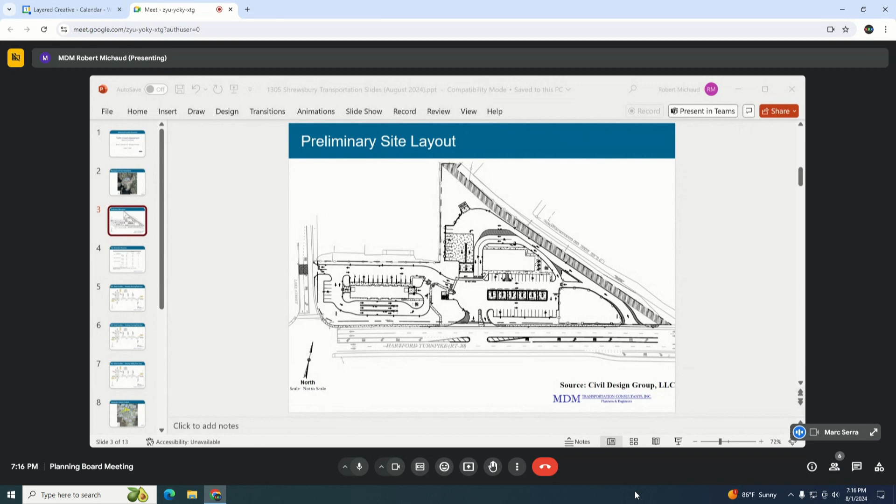In terms of traffic impact, we've conducted a full traffic impact and access study to a state-level standard. The project will also undergo a MEPA level review because of its adjacency to Route 20. That study quantifies how much traffic we believe will be generated relative to what's currently on the street and what we expect will exist 7 years from now, including many area background growth projects. There are approximately 9 area projects incorporated into this analysis.

Because I'll have to reshare this, I apologize, but You want me to try to drive the? yeah, could you, Christopher? I don't know why it's not.

While that loads up, we've applied industry standard trip generation rates to understand how much traffic this would generate in the aggregate. The next slide provides a summary table of what that looks like.

It's broken into the total number of trips, which is on average, depending on the peak hour, about 200 directional trips either coming into or leaving the property—slightly higher in the morning, slightly less in the evening.

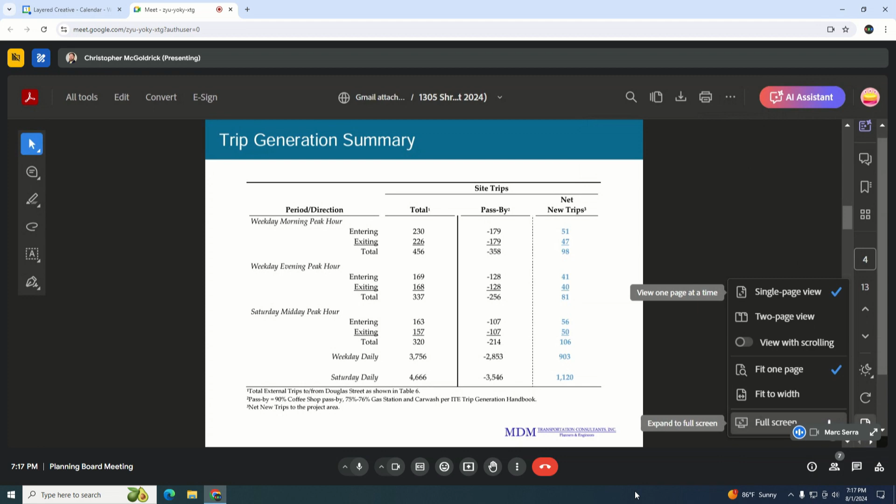Most of those trips are what are known as pass-by trips. These facilities—gas, convenience, car wash, quick service restaurant—are facilities of convenience that draw most of their business from the existing passing traffic stream. It's a well-established fact, especially on Route 20, a high-volume principal arterial road. The second or middle column indicates what proportion of total trips are actually not new; they're simply being diverted to and then leaving the site from the existing stream.

So the net new traffic from this combination of uses is approximately 40 to 60 peak directional trips, either coming in or going out per hour, depending on the peak hour.

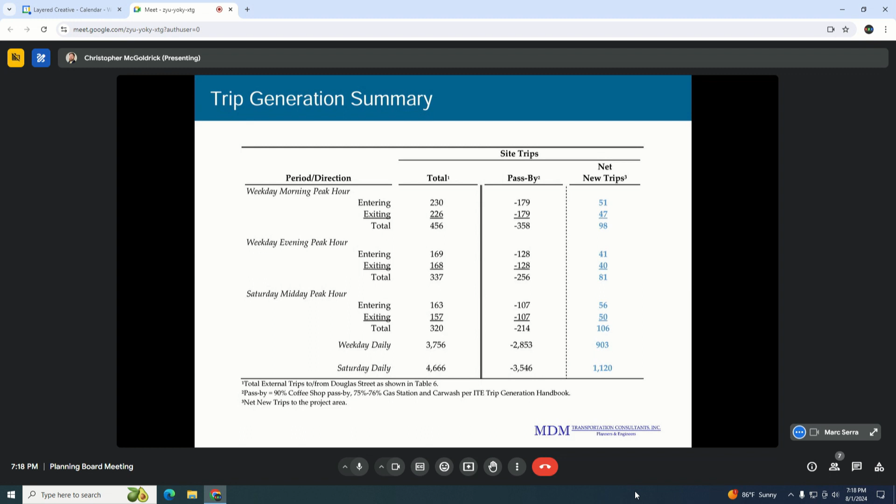The next slide indicates in a very schematic way what those new trips look like during a snapshot in time. This is a weekday morning peak hour.

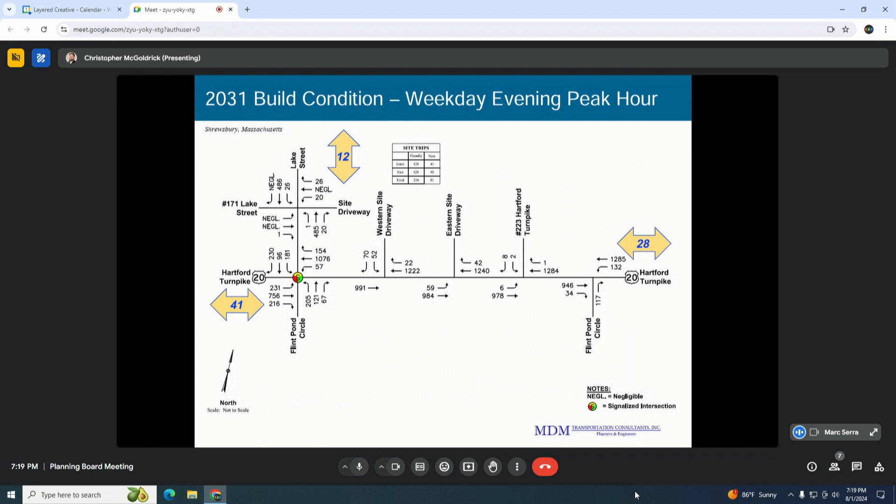This has been incorporated by default as part of the planning process applied to develop the infrastructure at this frontage. The next slide shows the equivalent weekday evening peak hour, with actually lower numbers, and the following slide shows the equivalent Saturday midday, again with fairly modest numbers.

You'll also see that there's not a whole lot of change between what we call no-build and build. Those modest numbers of trips I just presented, representing between one vehicle every two minutes to as much as one vehicle a minute, really aren't changing the dial on what this analysis is saying. So there is ample capacity, and it's not a surprise given the recent reconstruction of that portion of Route 20.

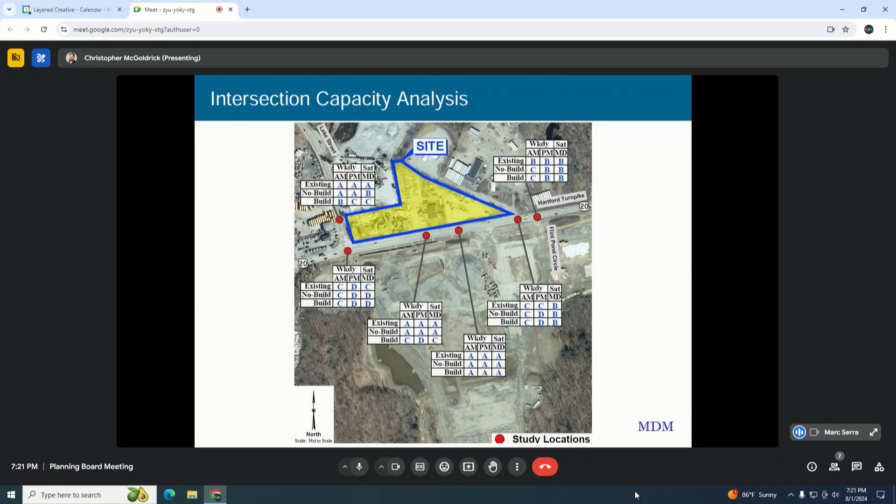Now, as we begin to look at the site and its functions, which will lead into what Phil will present, we did a queuing analysis, an assessment of how the car wash would function. We've got a lot of real data for car wash facilities. We do a lot of these these days.

This is a single tunnel facility with an operating capacity of about 120 vehicles per hour, so it has a high capacity to move vehicles through. It has the ability, based on its stacking lanes, to accommodate as many as 30 to 40 vehicles with absolutely no influence on on-site circulation or access.

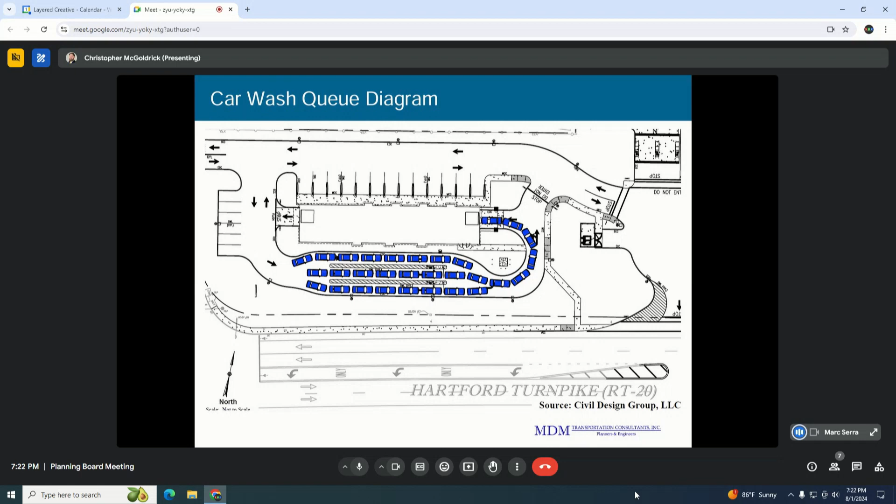The typical queuing conditions, presented in more detail in the traffic report, are going to be substantially less than what's shown in the diagram here. So we're very satisfied that there's ample on-site queuing capacity to function well without influencing Route 20, the signal, or on-site circulation. The next slide presents a circulation assessment for the largest potential vehicle accessing and circulating within the property.

I mentioned earlier that the more easterly driveway, which is enter-only, is specifically designed to accommodate a WB67 or fuel tanker vehicle, both into and behind the site to the fueling position, and then leaving the site as a left turn to continue east if needed. There's plenty of on-site capacity for circulation, and plenty of room at the driveway to facilitate appropriate deceleration into the site and eventually to the stop position. The next slide presents similar information for a different vehicle type.

This is someone coming eastbound who wants to turn left into the property. They get into an exclusive left turn lane that exists there today. It will be slightly extended to allow for a better deceleration into this driveway, one of the comments that DOT had for us, and its swept path also works quite well.

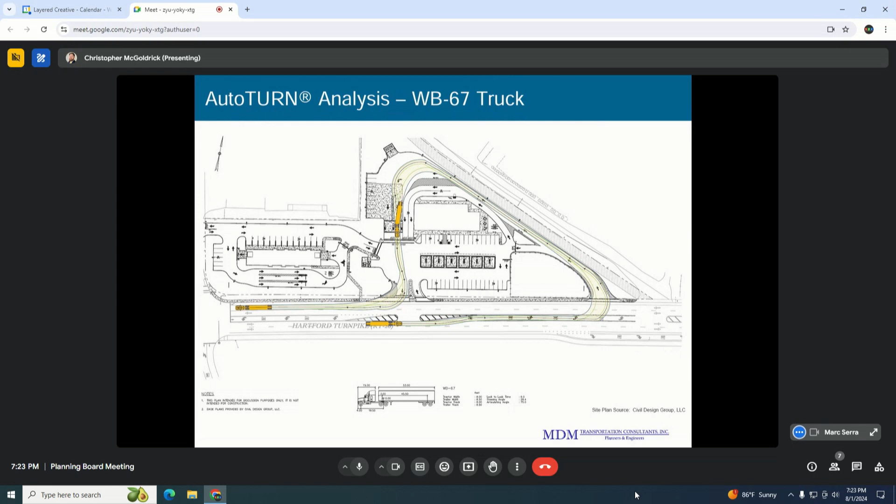When departing the site, making a right turn to go westbound toward Worcester, you'll see that the driveway design specifically accommodates that larger sweep. The design will include striping and other elements that restrict this for smaller vehicles, but allows for that larger sweep of a vehicle so it can turn entirely into the rightmost through lane at the signal.

The next slide presents yet another version of swept path, this time for a fire truck—Shrewsbury's tower vehicle. We assumed the worst case scenario where they need to come in from the Lake Street driveway, and all of the circulation elements within the property are sufficient to accommodate all of those sweeps.

Finally, the last slide reflects a different path by that same emergency tower vehicle. So from a circulation standpoint, this is well designed with very modest impact. It will be subject to DOT review and approval through access permitting, and it is subject to MEPA, so there will be other eyes on this as well, not only MassDOT but others.

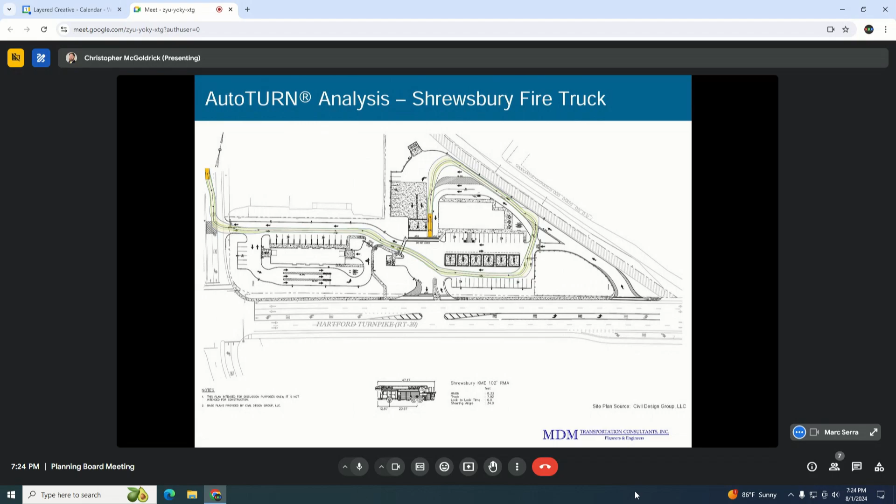So with that, I'm going to ask Christopher to open up the site plan set, which Phil will present. I'll hand it over to Phil.

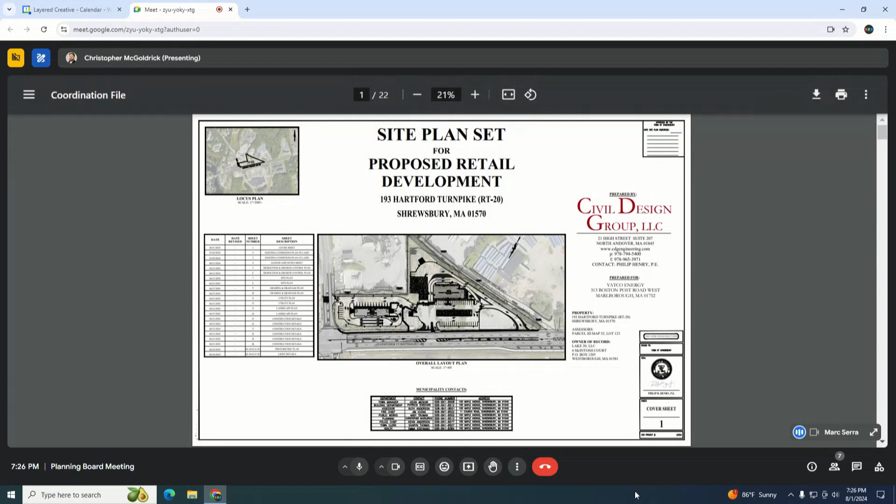Christopher, since Bob gave an overview and locus of the project, I think it'll be most efficient if I give a zoomed-in presentation. Let's start on sheet 7, the site plan. I'll go through the site plan, grading, and utility plan. You'll be looking at the westerly half of the site, then the easterly half, and then vice versa.

As Don had indicated, this site is zoned limited industrial, and it's also zoned Route 20 overlay. We chose to comply with the underlying zone, the LI or limited industrial district. So we think this site complies in terms of its building setbacks, landscape setbacks, requirements for stalls and the like.

So what I'll do is briefly go through and touch on some site elements on each of the site, grading, and utility plans.

Working from left to right, you'll see the site access off of Lake Street, proposed to be a full access curb cut. From there, you would enter the site and immediately see the wash structure, entering from the easterly side. Folks coming in on Lake Street could make an immediate right turn into the queue lane, or go straight.

Could you zoom in just a little bit, Christopher?

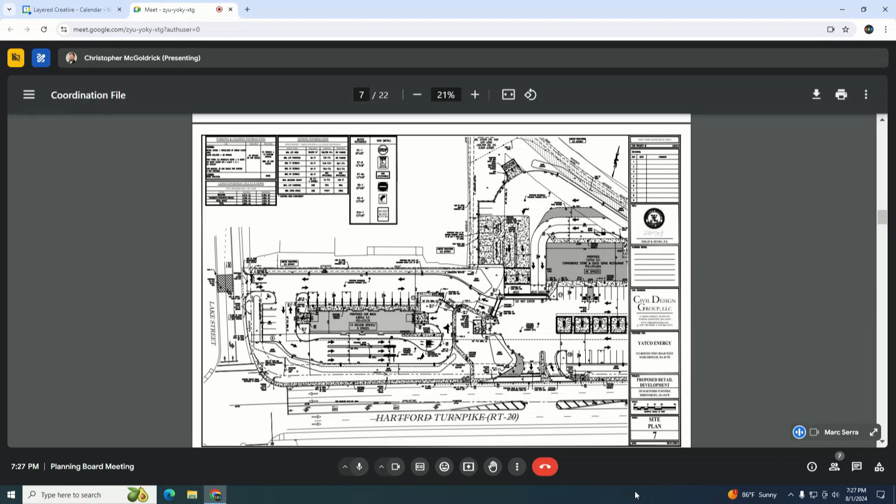Folks entering on Lake Street, proceeding straight, will encounter about 13 vacuum spaces just north of the structure. So folks could either vacuum their cars before or after.

Folks that eventually make it through the queue line will enter the car wash on the north side, making a left-hand turn into the structure. If for some reason those folks need to exit the car wash before entering, there's a sort of emergency exit as they proceed straight, as opposed to turning left into the car wash. From there, folks can go left or right.

Folks that go right would be entering the easterly half of the site, where the market and the quick serve restaurant will be, and they'll see the 6 regular, or low-speed, dispensers. On the left-hand side, or north, as they're approaching, they would see the high-speed diesel dispensers, and then the convenience store. Perhaps you can go to slide 8, Christopher.

Now we're looking at the easterly half. You'll see the full view of the 6 low-speed fueling dispensers, with 12 fueling positions. The market is set back behind the dispensers and just to the right of the high-speed fueling dispensers. Behind the high-speed dispensers is the underground storage tanks and 10 employee parking spaces, and just behind that is the trash receptacle, which will be enclosed in a vinyl fence or similar enclosure.

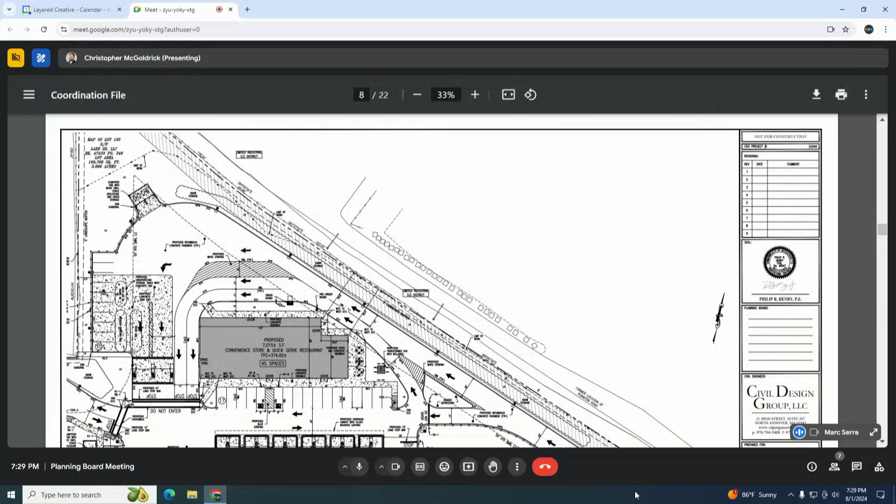This market is supported by 45 spaces located right in front of the building, forward of the 6 fueling dispensers, and accessed via a restricted central curb cut that allows right in, right out, and left in, but no left out—just a left in.

As we move to the easterly side of the site, there's the in-only curb cut, and from entering either entrance on Route 20, folks can get into the drive-through lane, with a drive-through entrance just to the right of the structure.

On this plan, there is proposed to be 29 site lights that are 25 feet tall, including building wall packs. There's ADA parking spaces located proximate to the front doors of the structures, directional signage, and snow storage. Overall, this site will have a decrease of just over 1 acre of impervious surface, or an increase of about 1 acre of landscaping throughout the site.

Sheet 9, Christopher. Looking back at the westerly half of the site, this is a fairly involved sheet, so there's lines going everywhere.

Basically, we're showing the contours. Mainly, the reason I wanted to show this sheet was to show that all the drainage is collected in 12 catch basin inlets and then is piped to the easterly half of the site.

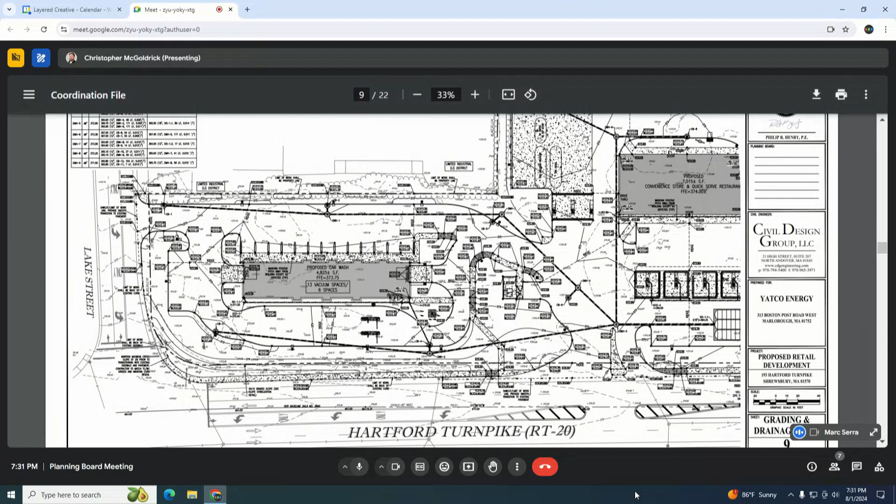Christopher, you can go to sheet 10. I'm happy to come back to this sheet if any folks have specific inquiries, but essentially you'll see there's a subsurface infiltration system just forward of the dispensers. Yep, right there. Most or all of the asphalt on site will be piped into that infiltration system first.

And then there's actually an overflow pipe, or two overflow pipes, that drain into an above-ground basin just east of that. Basically, that system will act as one in higher storms, or less frequent storms, I should say. In more frequent storms, that pond will most likely remain dry, and the water will be primarily infiltrated into that subsurface infiltration system.

Shrewsbury has a local regulation that requires static capture of 1 inch times the impervious coverage of the site. That subsurface infiltration system achieves that. So higher storms will overflow via the two 24-inch drain pipes that discharge into the above-ground basin.

We've had discussions with DOT. This is not only a site low point, but it's also, I'll call it, a regional low point. Along Route 20, this is the low point. So we think it's important to have a drainage connection. DOT's initial feedback says that they do not want a drainage connection, despite the fact that there is currently a drainage connection to the Route 20 driveway, Route 20 drainage system.

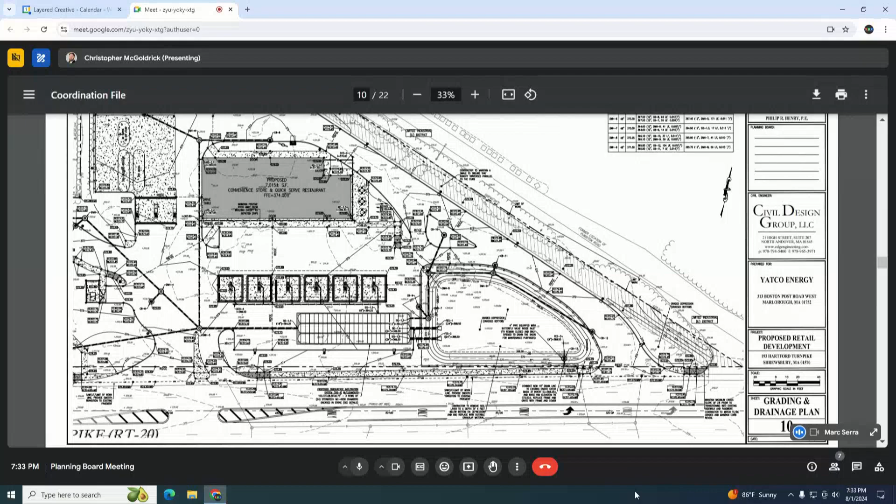However, as belt and suspenders, this above-ground infiltration system, should water get into that, which it will, and not infiltrate due to lack of maintenance or for whatever reason, there is a drain at the foot of that basin with a valve that can be opened to allow that runoff to drain, should it require maintenance.

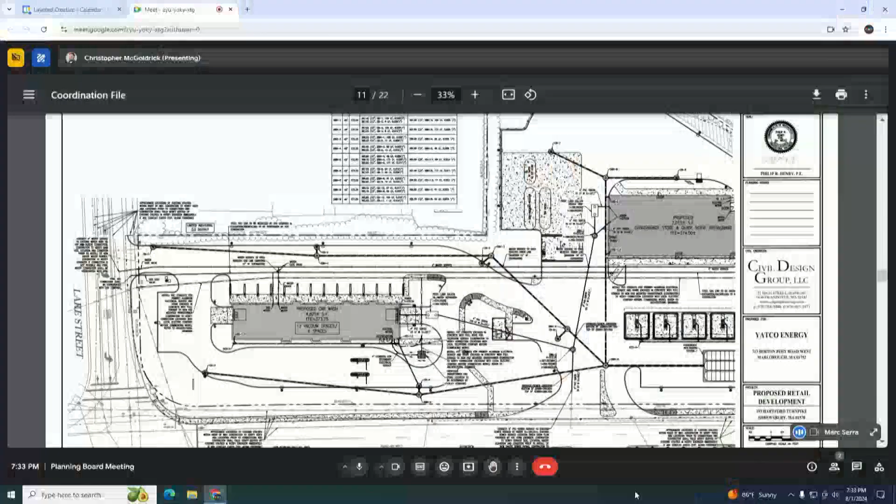Sheet 11 basically is the utility plan. This plan looks very familiar to an application that was on this site, probably before you guys a few years ago. Basically, the connection points for water, gas, and electric are the same, which come off of Lake Street, and they traverse west to east throughout the site and then service the buildings.

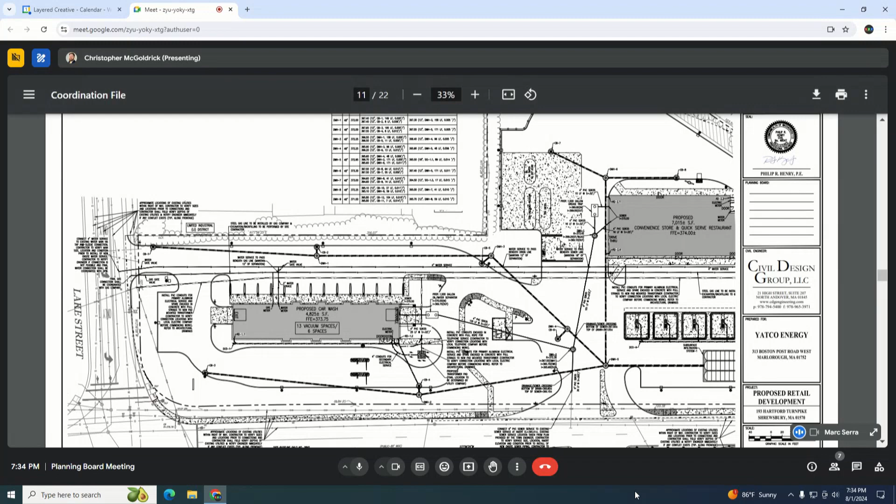And then the sewer connection is through an on-site capped sewer service in Route 20, right at the central driveway. So that will look familiar for those of you familiar with the project that was before you a few years ago.

And that's about it. Lastly, landscaping. We're proposing, I think, 15 new trees. We're concentrating the landscaping along the street frontage, over 200 shrubs and 150 ground cover. So that's the high level, but I'm happy to get into any more specifics. Thank you.

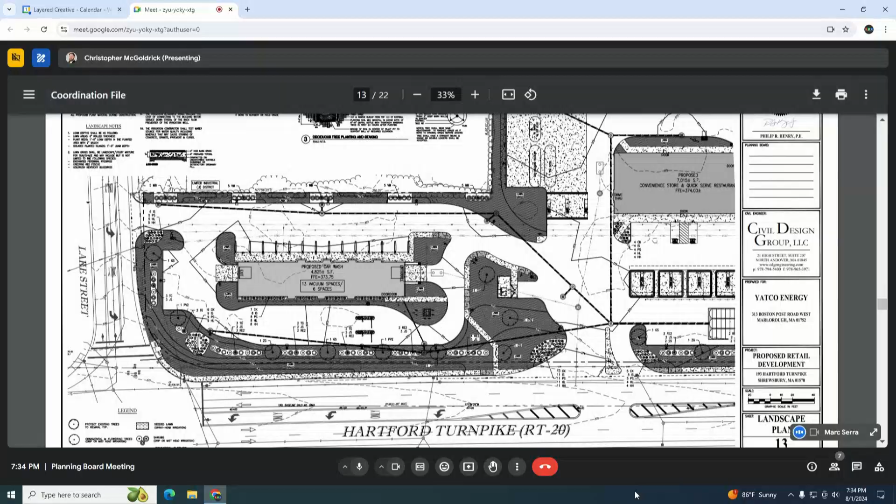Have you estimated the required water need for the car wash? Yeah, so we're estimating about 7,000 gallons per day. Comparatively, the market's going to use next to nothing compared to that. So we're proposing 7,000. The details of that have not been completely worked out yet.

There may be some of that's reclaimed, but we haven't worked out those details yet.

In terms of the access, that central in and out, when you're coming out onto Route 20 from the central access way, can the trucks take a left turn heading onto Route 20 East, or is it only right turn? Whether it's a passenger vehicle or a larger truck, they will both be allowed to make that left turn to head east. And that's an important factor for this particular site.

There's really no other good option to get back east. The benefit of the site and the way the driveway is laid out is that it takes advantage of the gaps that are actually being created by the signal. And even under the long-term growth scenario, the analysis shows that the vehicle queues from that signal don't ever reach that driveway.

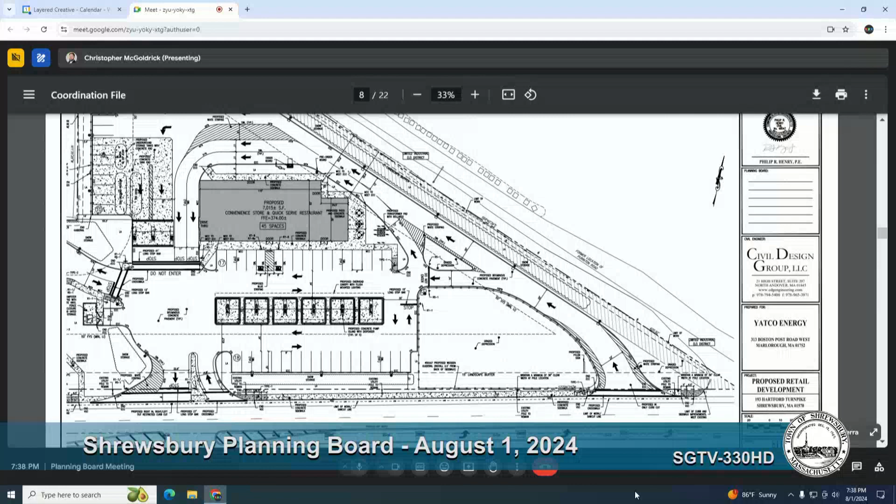We believe that this current design, really the only thing that changed relative to our initial concept was that we took the easterly driveway, the enter-only driveway, and pushed it all the way to the end of the property. What that allows is a more gentle deceleration in that existing left turn lane, which currently serves the industrial use next door to us anyway. So we've got plenty of deceleration area, plenty of storage, and the capacity shows that it all works.

So we don't expect any surprises, and we think, although DOT hasn't formally blessed this, that's subject to a permit, that it's well positioned. Thank you. Anyone else? Yes, Steve?

So Bob, you're saying like 1 or 2 vehicles per minute during peak hours you anticipate would take that left onto Route 20 East from the main access road? That's correct. And where does that main access road line up with the Market Basket breakaway that, in my opinion, works when you're turning onto the Market Basket site heading west?

Right before, the entrance is right by the Clinton Savings Bank. Oh sure, yeah, that's off the map so to speak. So they're not even close to one another. The enter-only driveway, if you focus on the right side, if you go another several hundred feet to the right of that, is the area you're talking about. So none of this access is going to be influenced by or to that driveway for Edgemere.

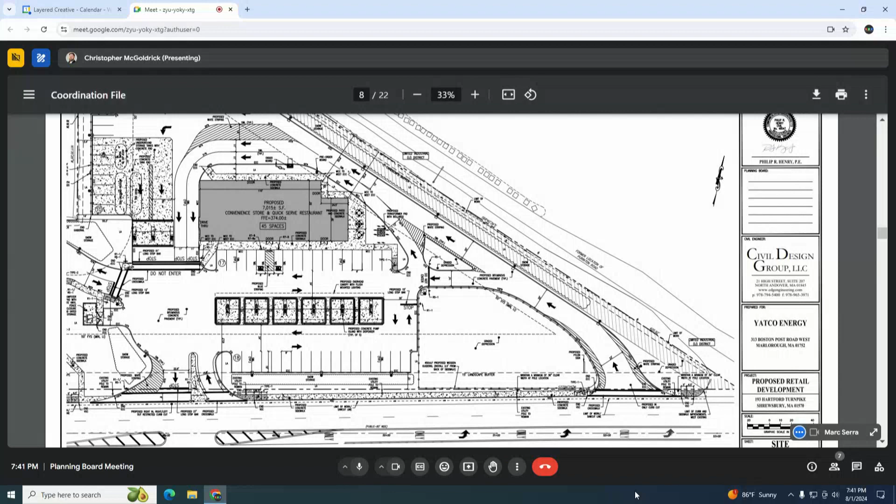Yeah, it's as far north as it can possibly go. Correct. One of the things we very carefully considered, right? You've got the bus terminal driveway, which is very close by there. It's within a couple hundred feet of where the signal is.

One of the features of the design, and it may be shown on the prior sheet, Christopher, is this striped box, this shaded box. The intention of that box is the 'do not block the box' marking. It's really intended to facilitate movements out of the driveway if necessary. But as a practical matter, that driveway is expected to generate about 20 or so left turns an hour. It's a relatively low volume driveway.

During peak? During peak, yeah. If you think about it, folks who may be inclined to go here wouldn't necessarily make it a dedicated trip during a peak hour. I started off by saying that the nature of the uses are that they draw principally from the existing traffic stream.

So if I'm on an eastbound commute in the morning and I need gas, coming down Lake Street, I'm already on Lake Street, I may be inclined to make a left turn into the site, but then I'd probably make a left turn onto Route 20 directly from the central driveway to continue my commute. Vice versa, if I'm coming from Worcester heading east, I'm not going on Lake Street, I'm turning directly into the site. So that driveway is important because it provides a local connection for anyone who wants to get there more directly from the local neighborhood system. But it's not driving a high volume, and it's certainly not driving a lot of new volume.

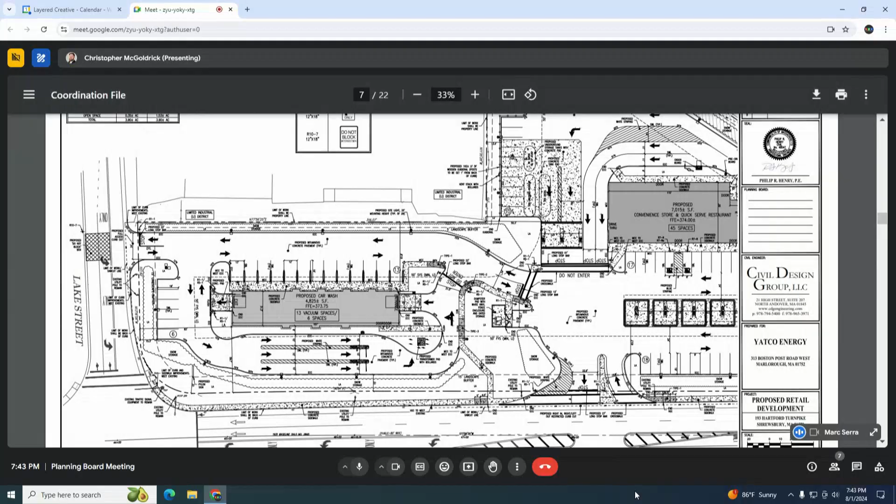My only comment was, if you don't get the left turn eastbound on Route 20, what does that do to the Lake Street intersection? Yeah, that's the exit movement, the left turn exit. But that's not our call, that's MassDOT. Ideally, MassDOT approved a certain infrastructure design along Route 20. Ordinarily, a design like that would accommodate the potential for a barrier dividing the highway at some future date. That was never a consideration. There's no jug handle or ability to make a sweeping left turn from that left turn lane at the signal. It wasn't designed that way. I wish it had been, but it wasn't. So I don't think there was any contemplation long-term that there would be access restrictions along Route 20. Otherwise, that infrastructure would have been designed a little bit differently.

And the volumes we're talking about here are not rising to the level of a red flag, in my opinion. If this was a generator of new and substantial traffic, most of which was oriented to or from the east, I would think differently. But the nature of the use as pass-by oriented, the fact that it's a facility of convenience - if folks are having difficulty getting into or out of here, they'll go to the next place down the road, which is a lot more difficult to get in and out of. Agreed. So they'll end up in Northborough.

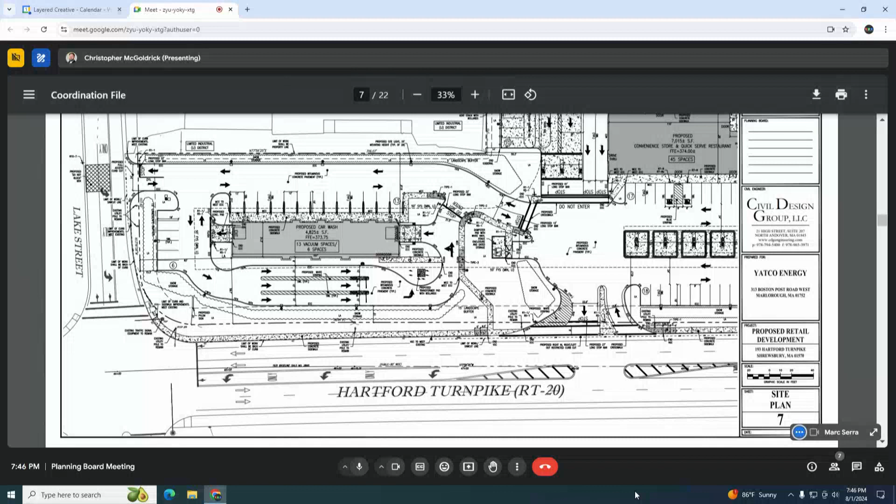Is there a clear line of sight, like in that triangle, from when you start to make the turn off of Route 20 onto Lake Street - is that all going to be low landscaping so you can see across? Right, it will have to be - the sightline triangle is what you're referring to. If you're at a stopped position at the driveway, looking left toward Route 20 to see if there's a gap, you'll easily see anyone coming from the Route 20 corridor. The sightline distance from that driveway extends well beyond just where the signal is. You'll actually be able to see well beyond the signal, probably for a distance of at least 200 to 250 feet, where vehicles are going at slower speeds than normal travel speeds because they're making the turn. The sightline for a right turn from the westbound through lane onto Lake Street - all of the landscaping and features in that area will be designed so the mature growth height is no more than 2.5 feet. You'll have clear visibility to that corner.

Somebody, evening peak, coming out of the gas station on that opening right onto Route 20 that we can see right now - at evening peak, they're not going to have trouble getting out and crossing 2 lanes of traffic? At 50 vehicles per hour, that's the volume that would be doing that. There are more than sufficient gaps. And I understand the volumes on Route 20 are high volumes, all right - that's what's modeled and what we've provided that will be subject to DOT review.

And it functions at a level of service D or better. What that means is it doesn't mean you won't have any delay, it means you'll have to be selective about making that movement, but you shouldn't wait any more than about 30 to 35 seconds. The queuing conditions under that scenario are going to be 1 to 2 vehicles on site. It's not a heavy enough movement, and there are sufficient gaps to accommodate it.

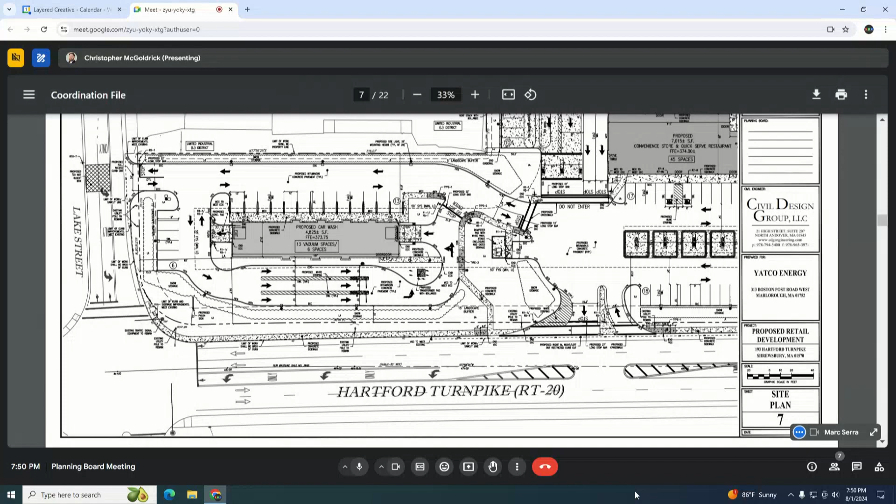I have one other question. So you got the system to collect the water. Is it all gonna be groundwater recharged? It's not gonna, none of it's going out into storm drains? So this site today has runoff from the site into the drainage system, into Route 20, and also into the property behind it.

We are charged with mitigating that runoff. So what we do is we prepare watershed maps. Basically, the watershed for this site is, points north receive runoff from this site today, and then everything else goes to Route 20. We wanted to mitigate, we wanted to basically bring down the peak flow rate to the northerly neighborhood almost down to zero, and then bring everything up front to Route 20, mitigate what's going to Route 20, but then meter it out via a drainage connection. DOT would not allow that initially.

So basically, this system is designed to infiltrate everything up to and including the 100-year storm. However, I will say the 100-year storm does peak over an on-site catch basin that's in the above-ground system that then discharges or is connected to the state system. As belt and suspenders, because things clog over time, we have basically a drain that is closed by a valve that, should water need to be drained out, it can be, as opposed to pumping it out. One last question, I promise.

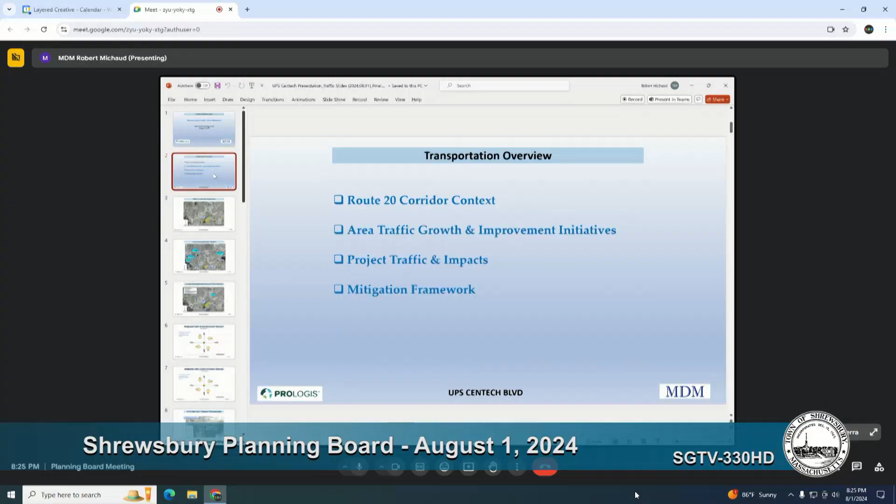So with that as background, what I'd like to do is really cover 4 principal points. There's a recap of the context of this project, which is very important to understand because of everything that's happening and that has happened along Route 20 by way of projects as well as improvements, and how the site sits relative to that. Second, we'll go into detail about specific assumptions on area growth, again an outcome of conversations with Mass DOT and the town planning department. Third, how much traffic would be generated by this use, what its orientation would be to the area, and what its relative impacts are. And finally, and I believe most importantly, the framework of a mitigation package that is intended to facilitate town action to advance improvements along Route 20.

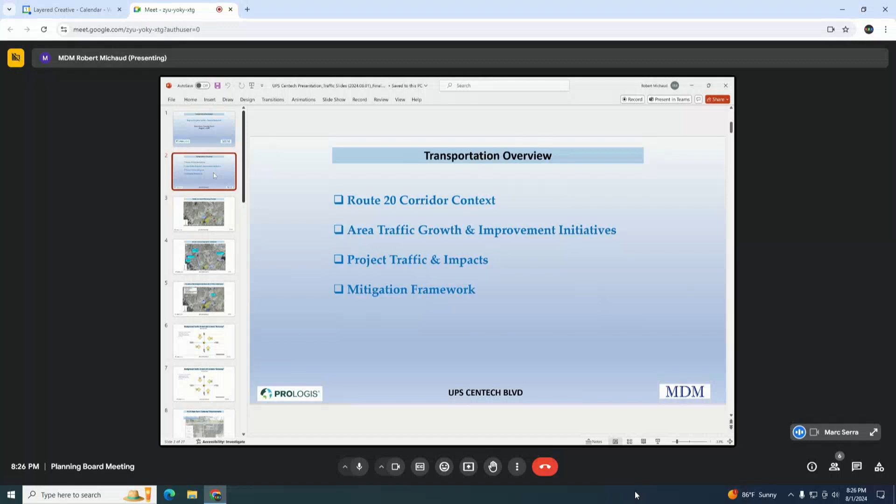So the site is an industrial zone site within an industrial park. So the context of the project is appropriate, and its relationship to the area is shown here on an aerial basis. It's located immediately proximate to Centech Boulevard, an industrial corridor.

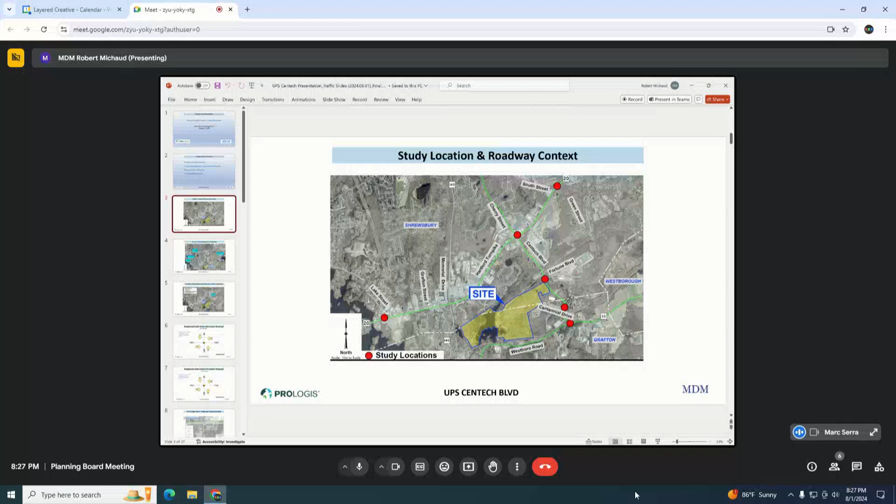Please, can you magnify? Image, if you can make it larger. Oh, I'm sorry, let me try doing that. There you go. Okay, is that better? Yep, great.

You'll see that it's also proximate to Route 20, and what we've studied and included in the impact assessment are the red dot locations. That would include to the west, the Lake Street signalized intersection. That's an intersection we've just discussed as part of another project. The South Street intersection to the east, also signalized, and of course, what we believe to be central to the discussion, which is the Route 20 and Centech Boulevard Cherry Street signalized intersection on the Shrewsbury side.

We've included the Fortune Boulevard commercial driveway as well, and we do have locations within Grafton that are studied as well. Peer review does raise question as to whether or not supplemental locations would be necessary. And the conclusion is that they're not, and I can get into the reasons why later. These are the principally impacted locations where we know that intersections will sustain a 5% or greater increase in traffic volume.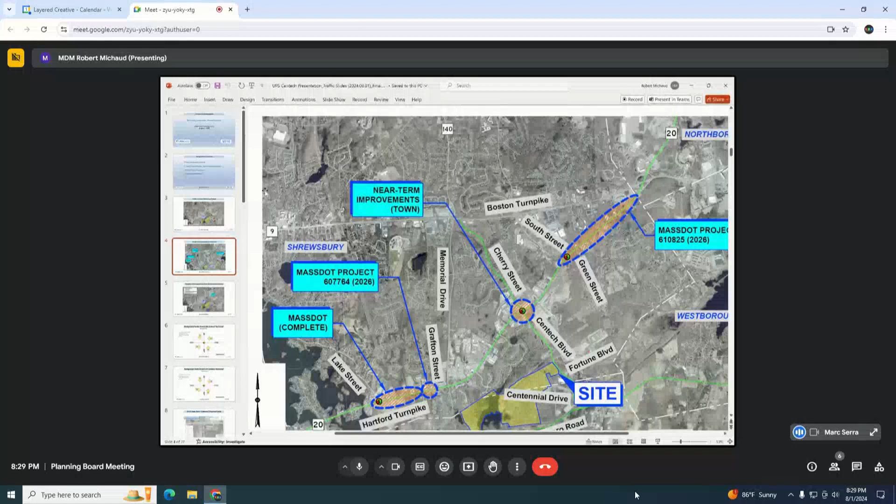And then, of course, you've got the Centech and Cherry Street intersection signal, which, based on our discussions with the town, is a focal point for an improvement initiative to address a pre-existing need for capacity enhancement. The context of that enhancement rests with the number of area projects that have been proposed, approved, or that are in process that cumulatively really drive up the volume there, independent of this particular project.

And they're all numbered here. There are 9 specific projects, one of which we've recently added to the mix because it was recently filed, which is the 5 Millennium 40B project, very close to the T station.

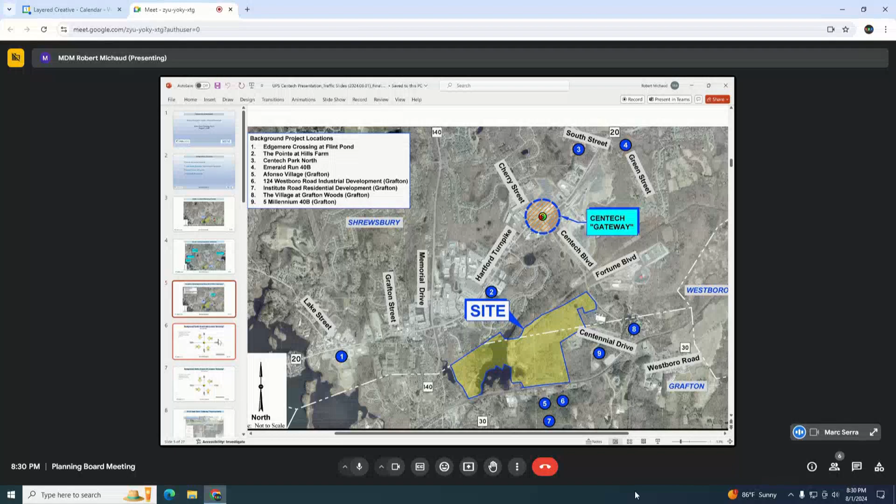So cumulatively, these projects, when you add the cumulative effect at that central location of Cherry and Centech Boulevard, are adding about 100 additional vehicles per hour eastbound, 60 westbound, 60 northbound, and 11 southbound.

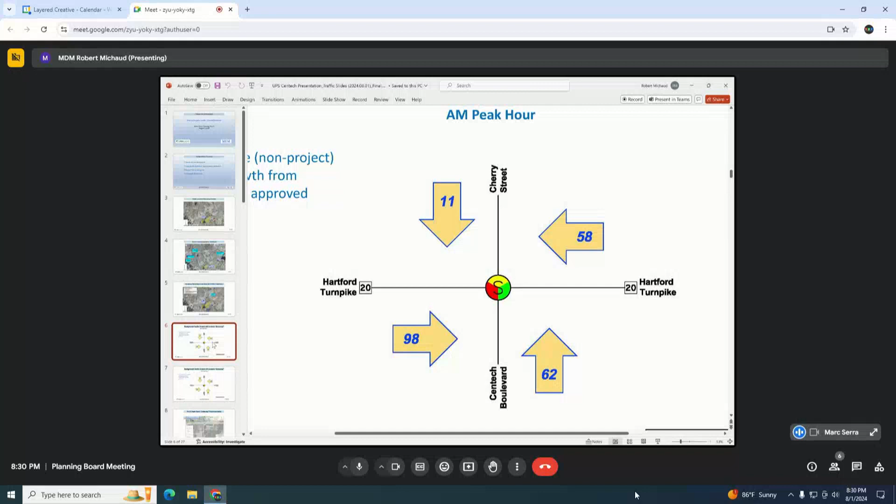And during PM peak hours, it's even higher. It's 124 westbound additional vehicles, 85 additional eastbound, 67 on Centech, and 15 on Cherry. So cumulatively, these are driving the need to do something, because no individual project has tripped the need to independently do something there. And that includes projects like Centech Park North, for instance.

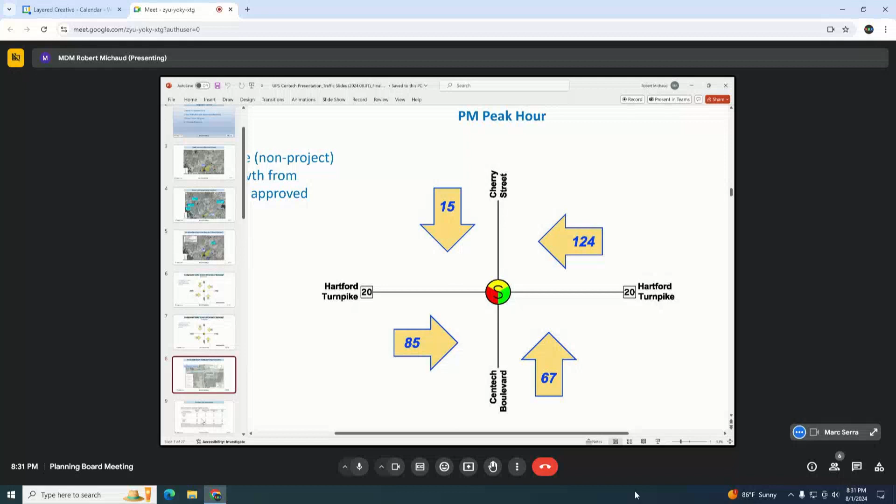In discussions with the town, we've identified an interim improvement that could address those cumulative impacts and those needs that exist independent of the project. I will not paint this as something that is a long-term solution, but it is a solution that will not only address the recently approved projects, but also the additional impact that's created by this particular use on Centech Boulevard.

And what it entails is a redesignation of the lanes and the arrangement of lanes on Cherry Street and Centech Boulevard, so that the side streets operate much more efficiently and are much more responsive to the actual traffic patterns that have occurred over time.

Specifically, if you travel on Centech Boulevard today, there's an exclusive right turn lane, and then there's a through-left turn lane, and vice versa on Cherry Street. Well, the patterns actually favor the opposite arrangement. You really want to have exclusive left turn lanes and through-right turn lanes. That reduces the amount of conflicting volume within the intersection. It reduces the need for the amount of green time that the side streets require, and it enhances the optimal operation of the intersection generally if you retime it.

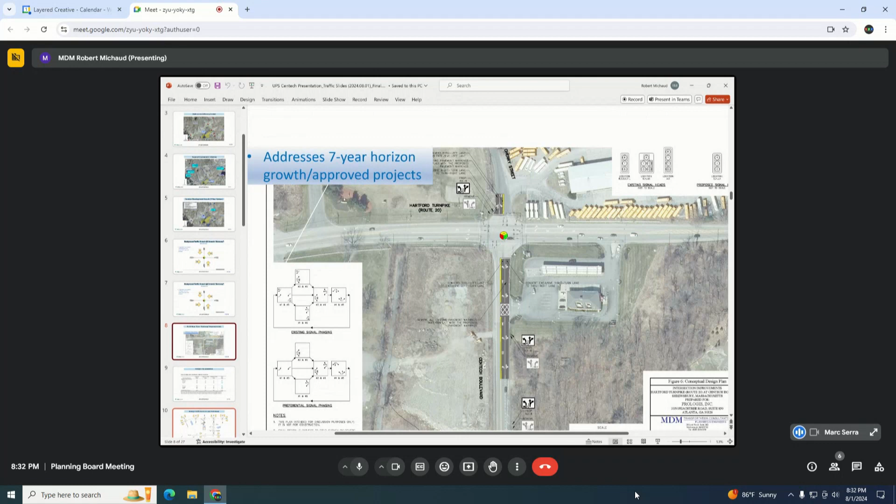So we'll put that aside for the time being, and we'll revisit that, but we'll now focus on what the project is anticipated to generate, and I've got to just zoom out a little bit.

We've engaged, again, with DOT and the town to understand ways in which we can accurately estimate how much traffic this site will generate. Industry standards are typically applied. The Institute of Transportation Engineers has the trip generation manual, which I'm sure you're aware of. You've heard this many times.

It has specific land use categories that typically relate to industrial uses, one of which is called High-Cube Parcel Hub. It's a rather generic description of an industrial process, which over time has substantially changed depending on who the operator is, whether you're an Amazon, a UPS, or a FedEx.

When we looked at applying those industry standards, we were questioned: are those high, are they low, are they accurate to the actual anticipated operation of the facility? So what we did was we went out to nearly identical facilities operated by UPS in Indiana and Salt Lake City that are almost precisely the same size, and in fact have a higher throughput or capacity than what's being proposed here. What I mean by that is that on an hourly basis, these facilities are designed to accommodate a certain output of parcels.

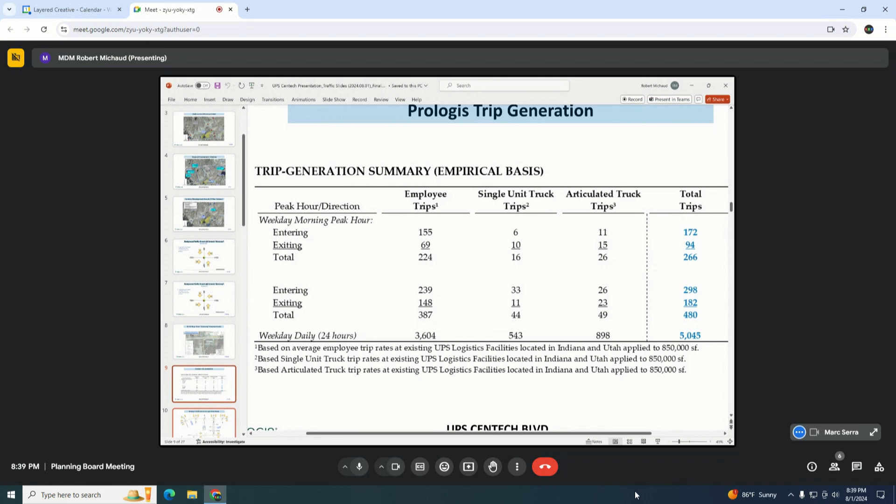You're talking what peak, right? Peak. These are peak. And even in the afternoon, the 480 combined total is still below those industry standards. Even so, we've conducted a supplemental analysis to include those much higher volumes in our study, to throw a wide blanket on this. And the results aren't that much different. We'll get into that in a moment.

And that totals to 69 vehicles, right, et cetera. Mr. Michaud, you're talking all vehicles, not just trailers or delivery trucks? All vehicles, correct.

We'll speak to the difference between what I'm presenting here and the truck numbers. They're much different, but the patterns for trucks will generally follow a similar pattern because of the brown package truck delivery protocols. They'll go to major employment centers and places of residence, so they'll pretty closely mirror existing travel patterns. That's the brown trucks, but the trailers are a different issue. We'll cover that in a moment.

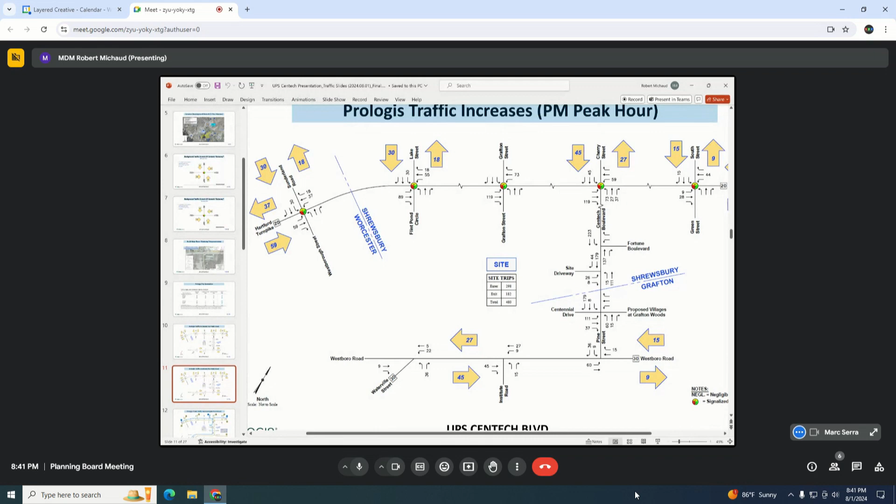Is that already in the study? It's in the peer review response. It is? Actually, I'm sorry, let me take that back - our response in peer review articulates this but does not have the graphic. Oh, okay, so this is the first time you've probably seen this. We wanted to make that and frame it - we tried to match the color of the truck too.

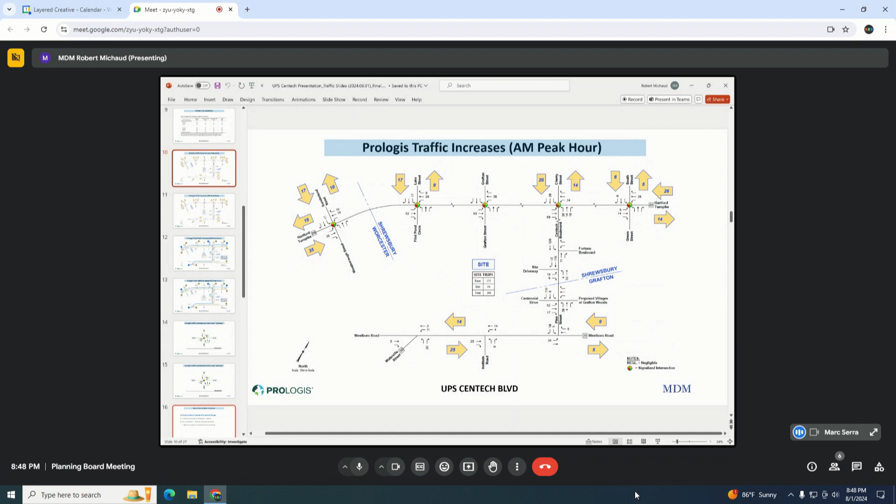Okay, so there is more traffic on Route 20. Absolutely. But the through traffic number is going to stay the same. At the intersection of Centech Boulevard. Right, and that makes sense, because every time I look at that, I was trying to figure out how that happened, and I even went back and I could not figure it out, but now it makes sense. Yeah, okay, so thank you for asking for the clarification.

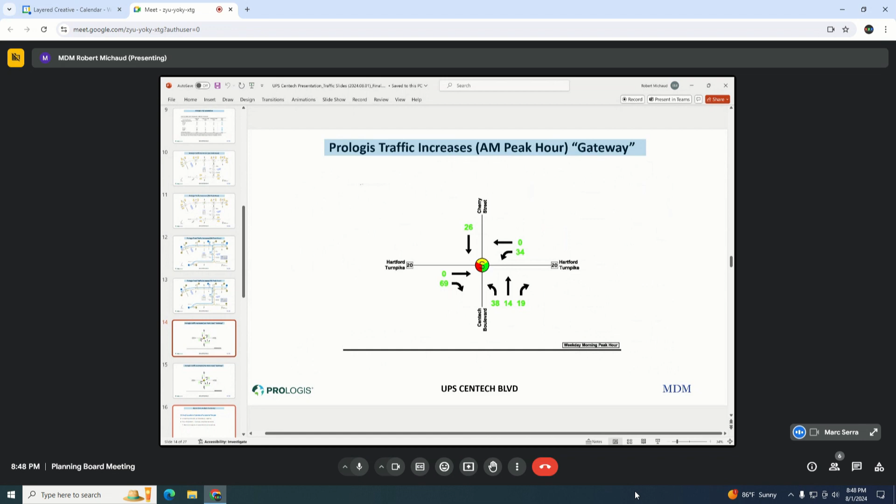So really, the purpose of this graphic is to say, look, I showed an earlier graphic showing the cumulative volumes from other already approved projects, none of which have made any contribution to mitigation here or elsewhere along Route 20. And they're substantial. These are the additional volumes that are specific to this project. They're actually far less than those cumulative effects, but they are adding to that cumulative effect.

And if we look at the PM version of this, the volumes are a bit higher. Right turn movement onto Centech went from 69 in the morning to 119 in the evening - it's about 2 vehicles a minute. So we are increasing volumes here, but they're manageable increases, and they're not increases on what we call the critical intersection movements, which, in the evening, as an example, would be a westbound through movement.

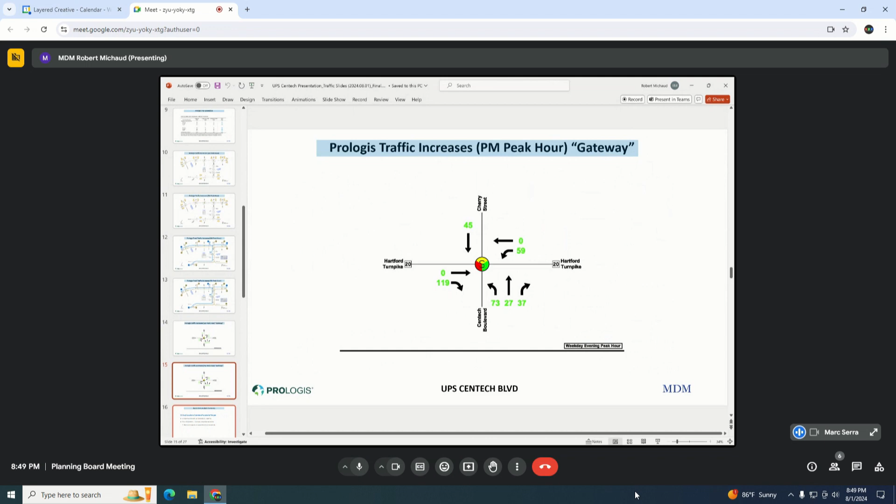We're not introducing additional through traffic there. We're actually absorbing them as a left turn onto Centech Boulevard. Further up on Route 20, it's certainly increasing, but when they get to this intersection, they're then turning off of Route 20. So really, given that as a context, we've done a very detailed analysis using approved standards that are subject to peer review.

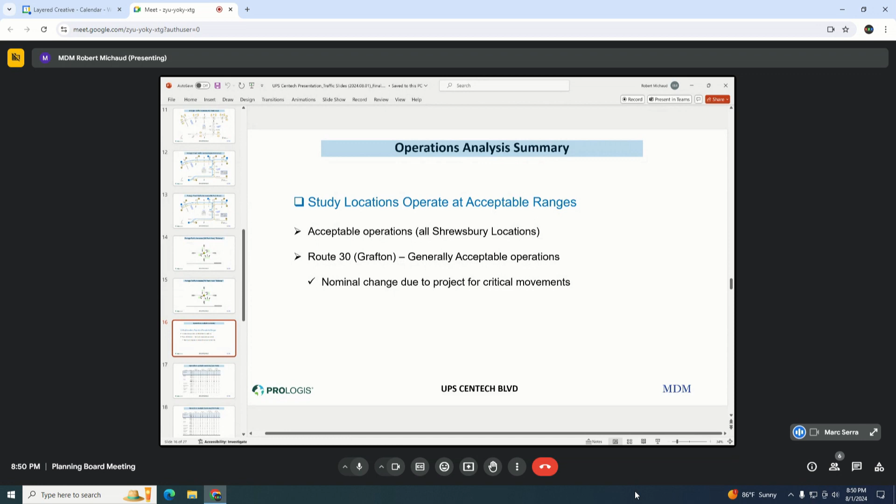And we're assuming, based on our discussions with the town, that there will be an implementation of near-term improvements at Centech and Cherry, based on the prior drawing that I showed. And with those in place, acceptable levels of service can be achieved, right? Is the improvement there a magic bullet solution? It is not, right? MassDOT and the town are both aware and are continuing to pursue longer-term improvements that are needed, independent of what we're doing here, and that's just part of the story.

So acceptable ranges, you're talking about that intersection? Yes, any intersection. No, but this, what we were just talking about, you were talking about the intersection. Yes. So we weren't talking about capacity on 20 that might be driving by, right? Yes. Okay. Absolutely. So volumetrically, that's what these tables are, and there's a lot of numbers and letters on this.

But I've highlighted the most impacted location, which is the Cherry and Centech Boulevard intersection, and I can kind of zoom this in a little.

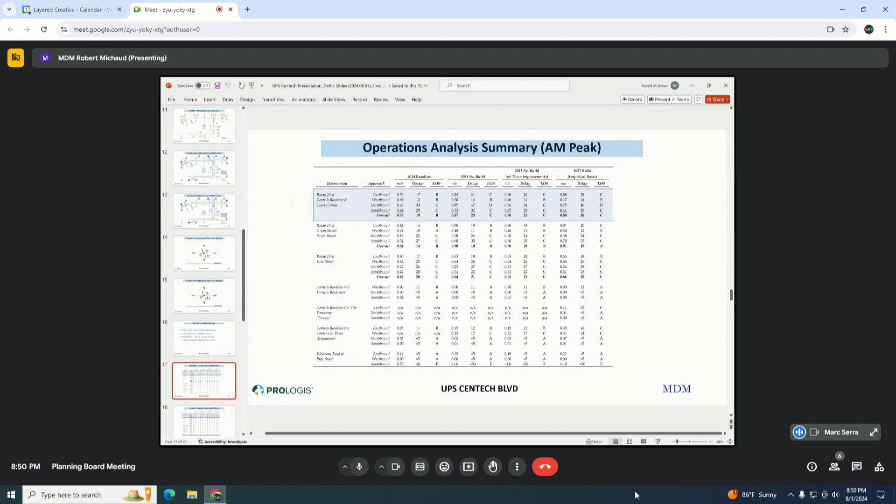An acceptable operating standard, as defined in the state, is a level of service D or better operation. It doesn't mean that queuing won't happen. It means that the average amount of stopped delay a motorist experiences should be less than a certain level.

Which at level of service D is 40, actually 50 seconds or so, or less. In this table, this is a weekday morning peak hour, you can see the baseline conditions at that location are at B or better. There are C's, northbound and southbound. Those go to D in one example because of cumulative growth independent of the project. Eventually when the town implements an interim improvement, that actually improves, goes back down to C, and remains a C with this project in place.

Morning's not the issue. Evening is the issue at that location. Anyone who travels that on a regular basis knows that. Any other location we've studied is well below capacity, level of service C or better at virtually every location within Shrewsbury. That level of service C or better operation is an outcome of the improvements recently implemented on Route 20 at Lake Street, for instance, or that are in process east of here from South Street moving east. So there aren't any capacity constraints per se along Route 20 in Shrewsbury, but the focus is what happens here where all of that volume converges for our site.

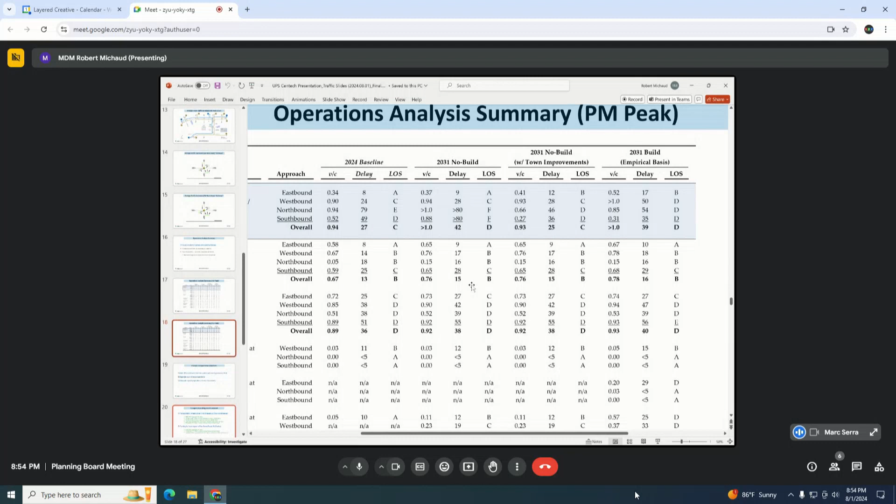Okay, thank you. And as was the case in the morning, all of the other locations we've studied within Shrewsbury are D or better. They're all acceptable operations. No surprise, because there's a lot of infrastructure in process right now.

Now, with that, we'll get into kind of a mitigation framework. The objectives of this project are to provide safe and efficient access to and from the site, hands down. It has to operate that way. The site access is designed so that any of the employee-related trips are going to and from Centennial Drive into the property via that intersection that already exists. There'll be a new truck driveway along Centennial as well, to physically separate those two functions of the building. All of those designs are compliant with good industry standards, with sight lines and visibility, et cetera.

The other objective, of course, is to ensure there's adequate capacity on every intersection that this facility would rely on to get people safely to work and for trucks to get to or from the facility.

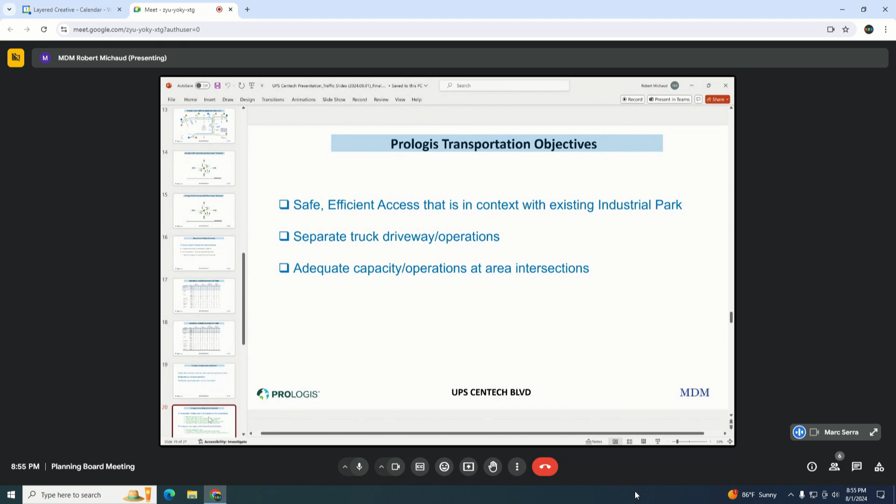With that, there's really two components of the mitigation framework being discussed with the town, comprising a $900,000 aggregate funding amount, a portion of which would offset any cost associated with the interim improvements I just mentioned. Those interim improvements are roughly $100,000 or less, leaving a balance of $800,000 that could be used to advance and complete a design of longer-term improvements along Route 20. That's important to understand, that there can be no construction funding application without a design. Design has to precede an application to MassDOT to secure construction funding.

This project, through its funding contribution, would allow that design to happen, and for the town to then be in a position to advocate and apply for appropriate funding, as was the case with the other segments of Route 20, east and west of this particular area.

Now, I want to put that number in context. The proponent's impact from a capacity standpoint at the most impacted location, Route 20 and Centech Boulevard, is about 8 to 9% of the capacity of that intersection. The long-range improvements identified in the Route 20 corridor study have a value of roughly $4 million for that intersection upgrade.

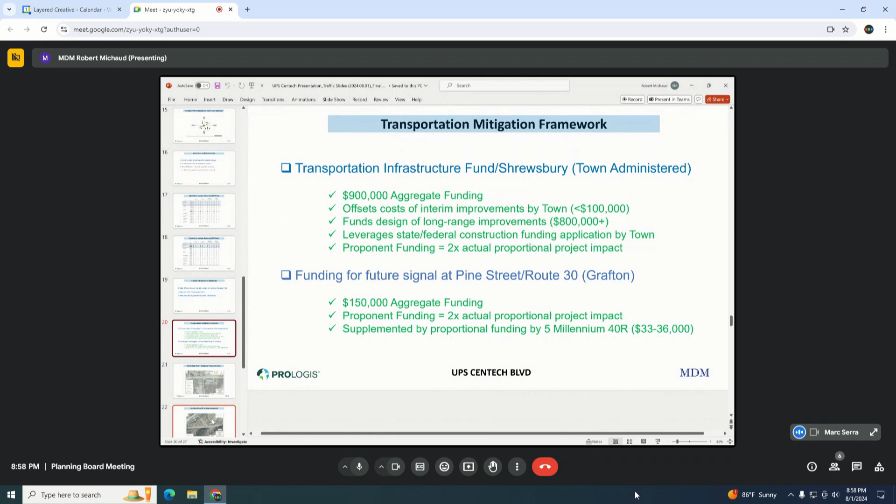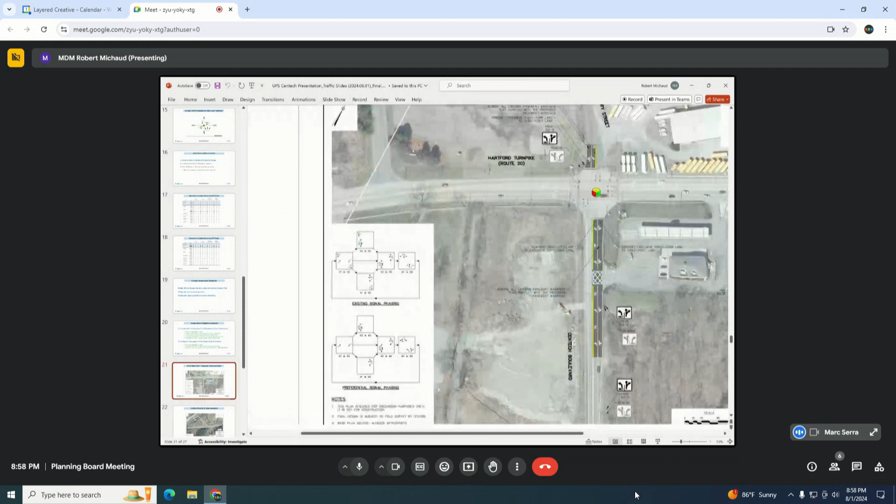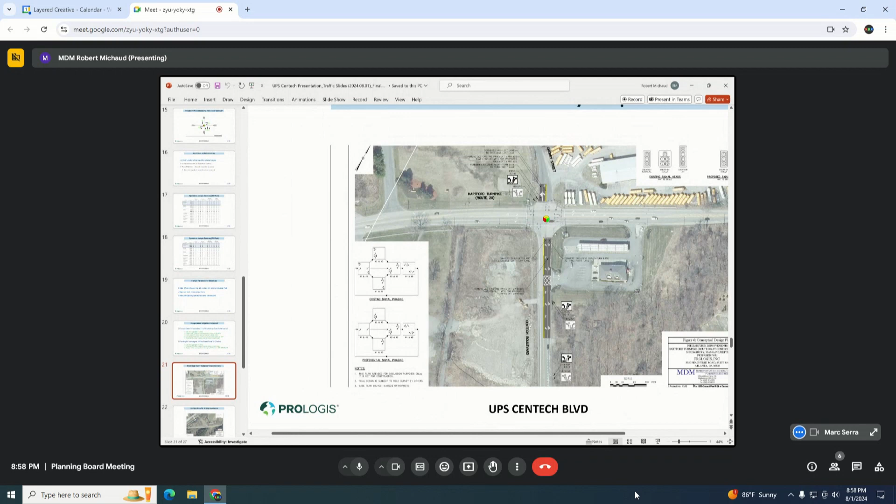So we've talked about the interim improvement. You can see in this diagram, on the left side, what this change in phasing and sequencing of the signal will be. This is the plan that would need to be engineered and would be subject to town permitting at DOT. And then, of course, on the Route 30 side, a future signal at Route 30.

As a recap to peer review, we're not going to get into the details, but there are really 4 principal points I want to make as a precursor to that discussion. One, many of the comments that were issued were simply asking for backup information or clarifying things.

The substantive comments had to do with whether or not the study area should be expanded, for instance, and we've addressed that by indicating a more definitive tracing of the trips that shows locations outside what we studied sustain less than a 5% change in volume. The standards for traffic impact studies define substantially impacted locations as those sustaining a 5% or greater impact.

So we're not changing the volume conditions at other locations enough to warrant a detailed assessment. The one location, as I mentioned when I started, was Grafton Street or Route 20, which will sustain about a 7% change in volume, but as through-volumes. That's not going to change the levels of service, which are well documented as part of the Edgemere filing to be well below capacity, and already subject to design improvements by MassDOT. So including that didn't make sense from our standpoint. It could be included as an academic exercise, but there's really no value to doing that.

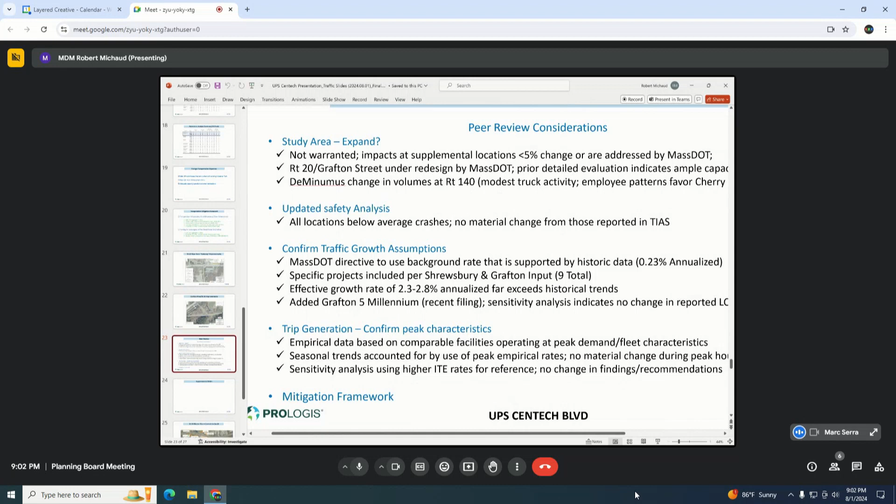I guess just to highlight and recall that the matter before you is for site plan approval. I think the mitigation plan demonstrates the commitment that Prologis and UPS made very early in this process when we first met with the city, with the town manager, that we wanted to make this a partnership. There is a mutual interest in limiting traffic congestion along Route 20. There is a certain personal interest to UPS to have some consistency and know what traffic patterns are going to be. And for people who travel on that road on a regular basis and have a frustration with it, improvements are well thought of. That's why the concept of a capacity allocation procedure, which is being used more and more in communities to determine what percentage people should pay toward the aggregate, is being used, so somebody doesn't end up spinning the wheel and getting stuck with the whole thing.

It's most recently been used in Grafton. That gets to a lower number, but we're interested in getting the work done. We're interested in having the plans prepared so that the town can seek financing or initiatives in order to be able to do the work, and that's why it's essentially being doubled in that case.

The concept would be that particularly for the near term, we would pay that contribution of $100,000 with the building permit, with the hope that would allow the town to do the work as early as spring or summer of 2025, well before we'll be using the intersection, other than for construction purposes, but to get it done and solve the existing problem that exists there for the town. And with that, we're glad to answer any particular questions the board may have with regard to traffic.

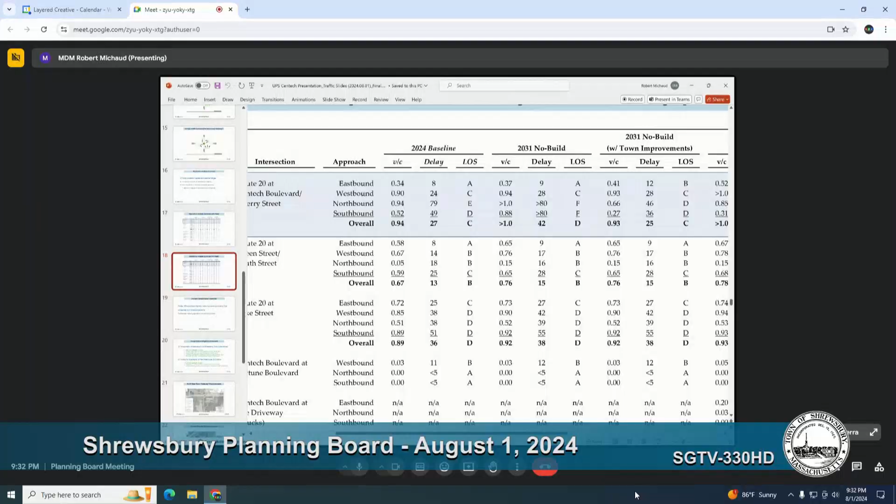And cumulatively, the 9 other projects beside ours are adding substantially more pressure to that intersection that are going to drive those E's to F's, right? And not only for Centech, but for Cherry Street as well. So that's what we've discussed with the town, and the town acknowledges and is pursuing this interim improvement to address that issue.

And the applicant's role in that process is to advance funding through an infrastructure fund that has 2 prongs. One prong is to say, we recognize it's gonna cost money to do that, so we'll take care of that, $100,000 rough estimate. And the balance is, we also acknowledge the need, because no one else is stepping up to the plate here, that to get infrastructure funding for the remainder of Route 20, you need to advance a design. That's how that process works.

And here's some money to do that. It's probably more money than you need to do that design. It's a substantial commitment to advance well beyond the 25%, probably the 100% design plan. For the intersection? For the intersection and all the way up to South Street. You mean to do the design work? To do the design work for that whole segment. Thank you. Okay.

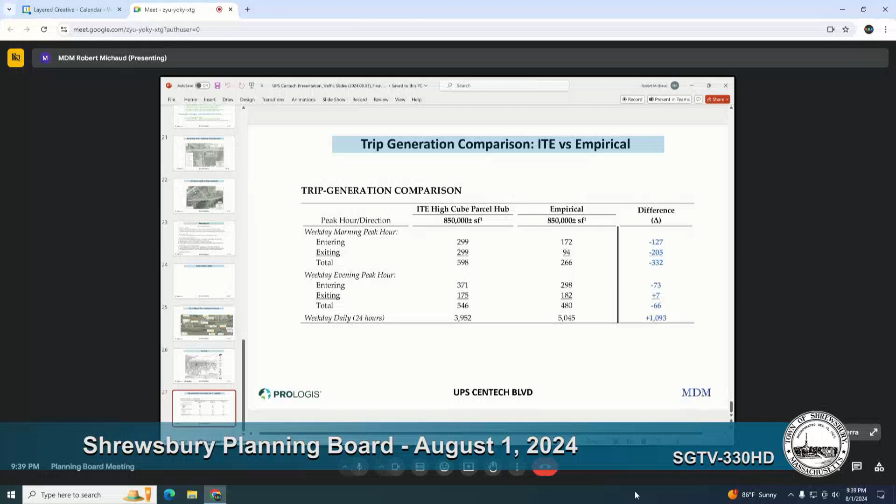One way to think of this - we also applied industry standard rates. What I'm showing on the board is the comparison between what we used for empirical information and what's estimated using ITE high cube parcel hub numbers. For high cube parcel hub, that's 600 cars an hour. We actually used that number in the traffic study analysis, ran those numbers, and still demonstrated that it works.

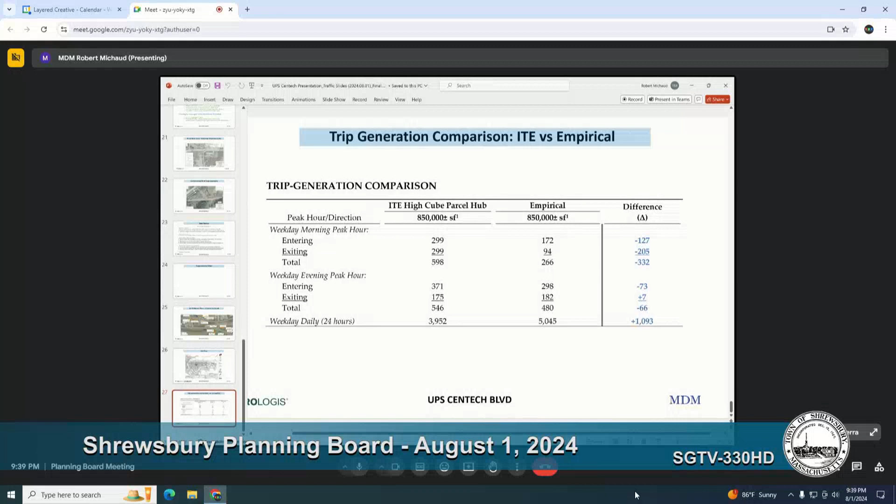Let me be clear, because if I gave the impression I thought UPS is gonna crash Route 20 and they're the only one responsible for it, that's not what I'm saying. I'm just saying it doesn't make any difference if it's UPS or those other 9 projects.

Traffic engineers seem focused on peak. People who live in the area focus on their experience all during the day. I know you say it's not subjective, but if every time you go out on a road - 10 years ago you could drive down without any problem, and now it takes 10 minutes longer to get from one end to the other - in everybody's mind, it's a problem. But you guys focus on peak, and I understand why. It almost seems, and not you in particular, it's the industry.

It still affects people all day long. And if those numbers really change, you can say perception, but I can give you an example. I used to be able to drive from A to B on Route 9 ten years ago, 5 to 8 minutes faster than I can right now. Because when I go to a light, the queues are longer. It just works out that way.

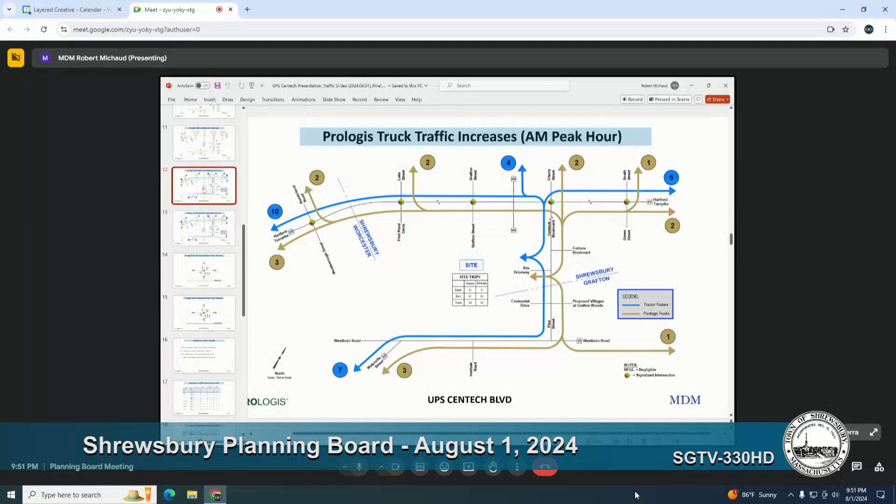I'd have to look at the exact wording, but the intention of that response was twofold: to identify that articulated heavy commercial vehicles would be essentially on Route 20 and major commercial routes, principally Route 20, principally because of its connection to the Mass Pike and the transportation hubs in Worcester. Package trucks would be using 140, Lake Street, and other local roads to disperse to the residential concentrations they're making deliveries to, and commercial.

I don't understand, can you look at that? It was on page - I think it was comment 27, it might have been page 27. You don't need to do it now. But if tractor trailers - if that's tractor trailers and they're going to 140, or they're going to Route 9 - well, if you go Route 9 one way, it's one thing, if you go the other way towards Worcester, it's another thing.

We will clarify that. Okay. And then I'll stop. Okay. And then next week I'll have 10 more questions for you. But they're good questions, I appreciate it. I'm sorry, I get geeky about stuff. I want to know why it works the way it works. It's not the first time I've heard questions like that. Traffic's a fascinating subject.

It's just the way I think. I'm sorry. All right, but we're not going to solve anything tonight anyways, right? Oh, I'm sorry, this is a public hearing. Our lone audience member may have a question. I forgot.